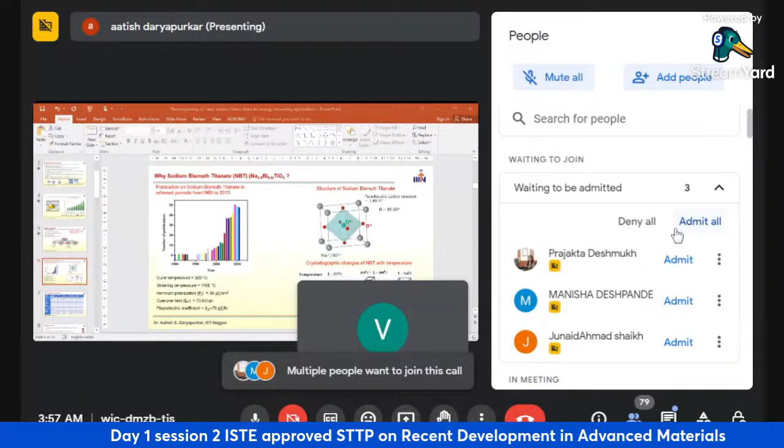Oh, you should have informed me earlier - there are many slides that I have shown, you could have told me sooner. Sorry. Now it is visible. Why is it not changing? Now it's showing, but not full screen - it should be full screen, no? What can be the solution for this? How should I share this? Yes, what is the solution? Okay, just give me a minute, I will rejoin the session.

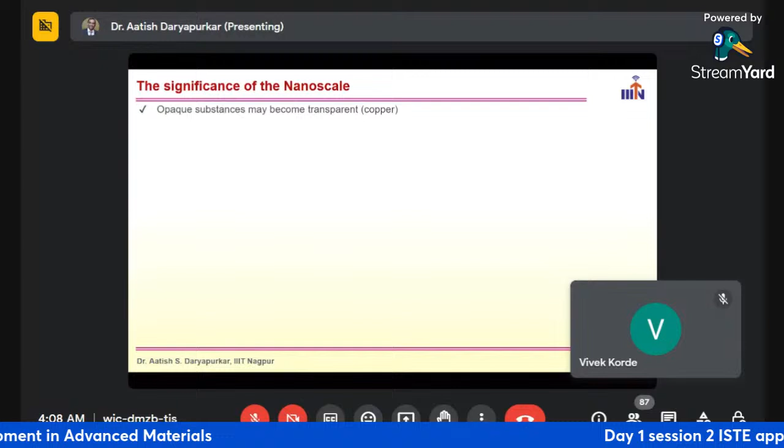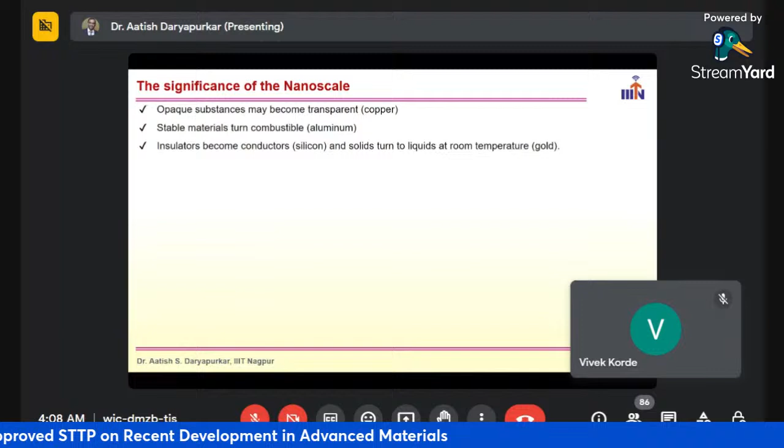For example, an opaque substance may become transparent in case of copper. Then stable materials turn into combustible materials, example aluminium. Then insulators become conductors, example silicon, and solids turn to liquid at room temperature, example gold.

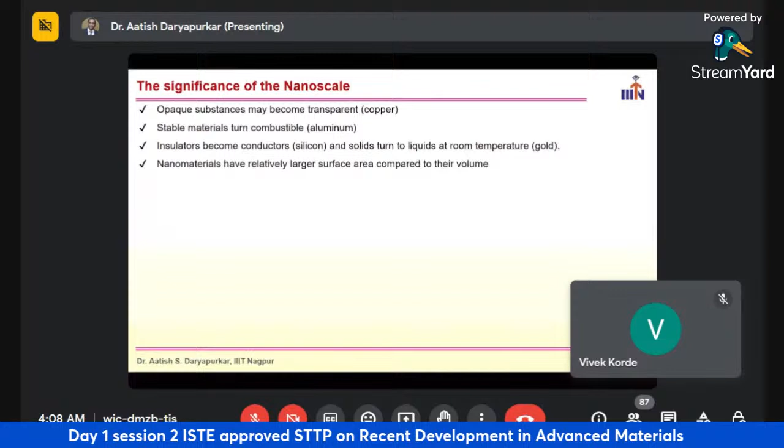Now, why does this property change? Because nanomaterials have a relatively large surface area compared to their volume. And you know that whatever happens in nature happens at the nanoscale. Now, the quantum effect can begin to dominate the behavior of matter at the nanoscale, affecting the optical, electrical, and magnetic behavior of materials. Now, what is the quantum effect? The effect or phenomena which can be explained using quantum mechanics, which cannot be explained using classical mechanics, is called the quantum effect.

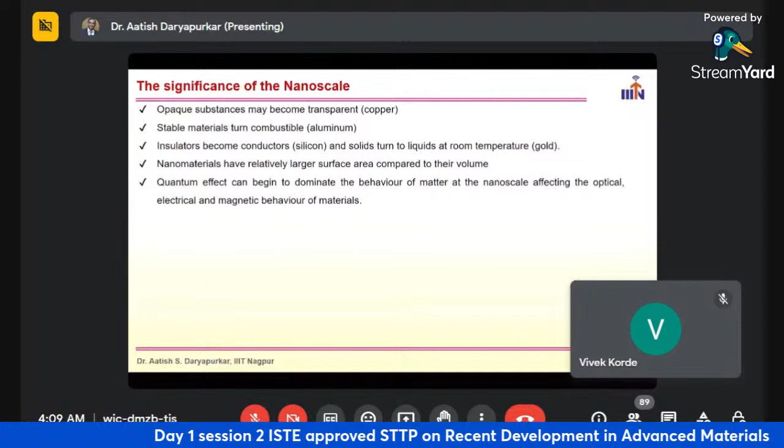Now, an example of this quantum effect is the tunneling effect. Then the bulk property of material often changes dramatically with nano ingredients, so you can get a better property. Then there are electronic and optical properties.

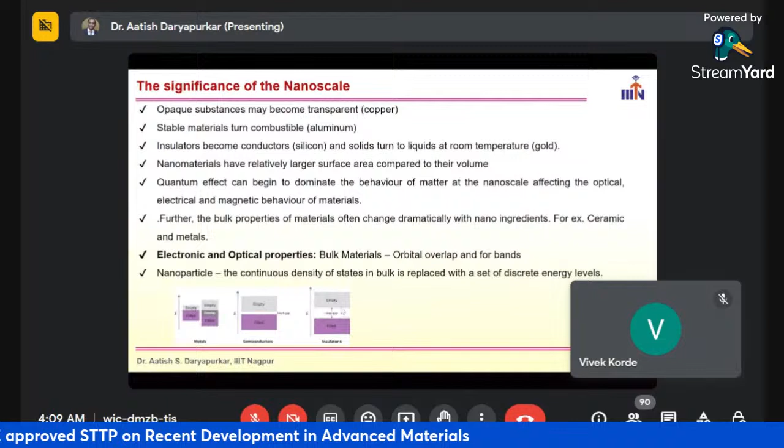For example, in bulk materials, we have bands, that is conduction band and valence band. Now, if you see metals, the valence band and conduction band overlap each other. If you see semiconductors, there is a small band gap between the conduction band and the valence band. And if it's an insulator, the band gap is larger between the conduction and valence band. Now, when we synthesize in the nano range, this band structure converts into discrete energy levels, and because of this, the electronic and optical properties are changed.

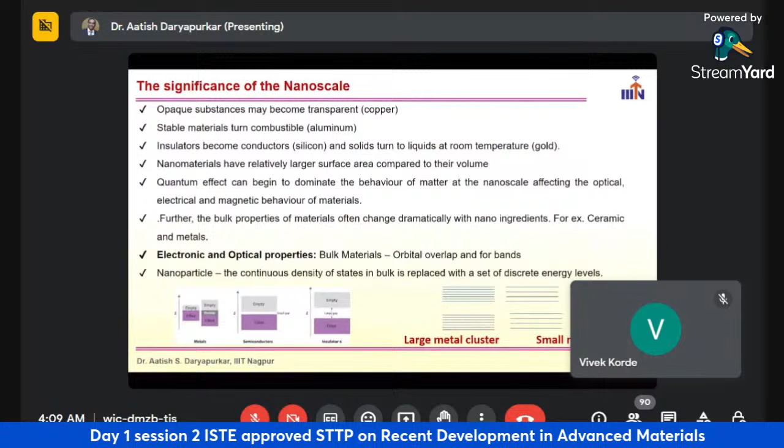Now the slides are going well with my talk.

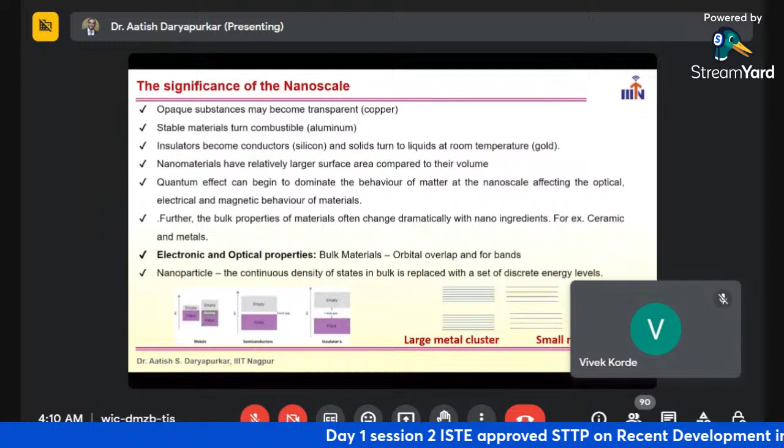Hello, am I audible? Ah, now the slides are going well with my talk. Okay, great. Now slide number 4 is going on, right? This is in the corner, right? Right, yes. So this was the slide we were discussing.

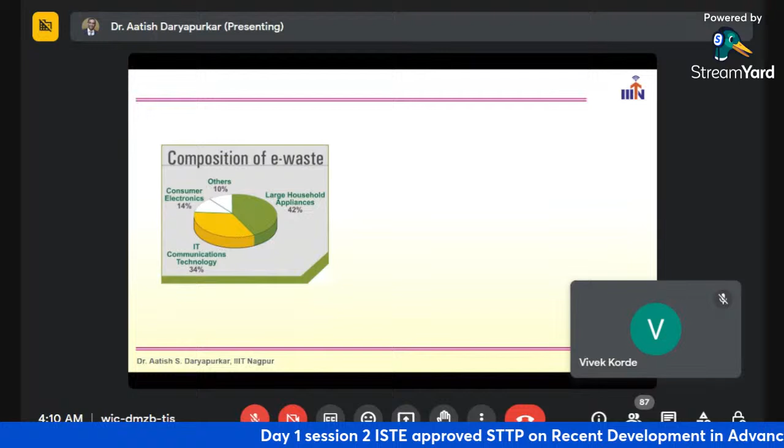Now you know that the electronic industry has developed a lot, and there's a lot coming up. So if you consider e-waste, called electronic waste, and look at the electronic instruments: large household appliances consist 42%, then consumer electronics 14%, IT communication technology is 34%, and others 10%.

So this much e-waste is produced, and the whole world is facing a lot of this e-waste problem. And how can we manage this e-waste problem? If you see data generated by the Center for Science and Environment from New Delhi, the volume of e-waste will go up to 2 million metric tons by 2025.

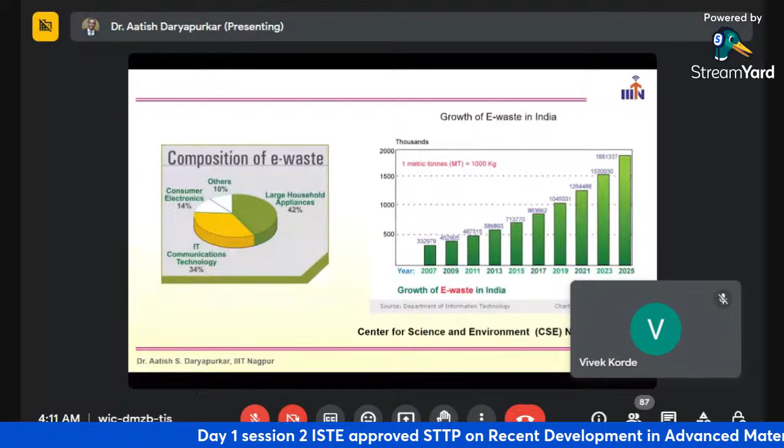And this issue can be solved in two ways. One way to solve e-waste toxicity would be to manage it properly. I was discussing we have a lot of batteries at our home, but we don't know how to destroy them, where we need to put them. We throw them in a dustbin, and from the dustbin that waste goes out to the village, to the city, and it spoils the complete environment - your water, your soil, your air. So if we have awareness on how to destroy e-waste, then that problem can be solved.

And another way to take care of this problem is to replace toxic materials which we use in device fabrication with non-poisonous or non-toxic materials that exhibit comparable properties. And that is exactly the motivation of my research work.

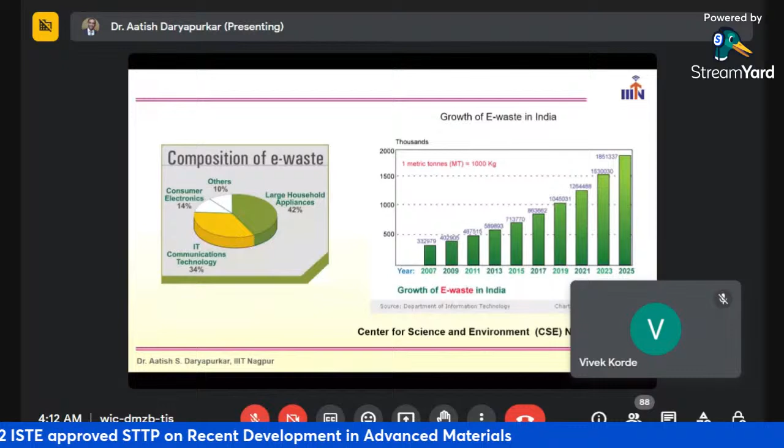Then I did the literature review and observed that the lead family - lead titanate, lead zirconate, lead magnesium, lead hafnate, lead stannate zirconate - this lead family exhibits very excellent properties which can be utilized for device fabrication. Majority of the time these materials are used in capacitors, and all materials are categorized depending on properties like dielectric, ferroelectric, piezoelectric, and pyroelectric.

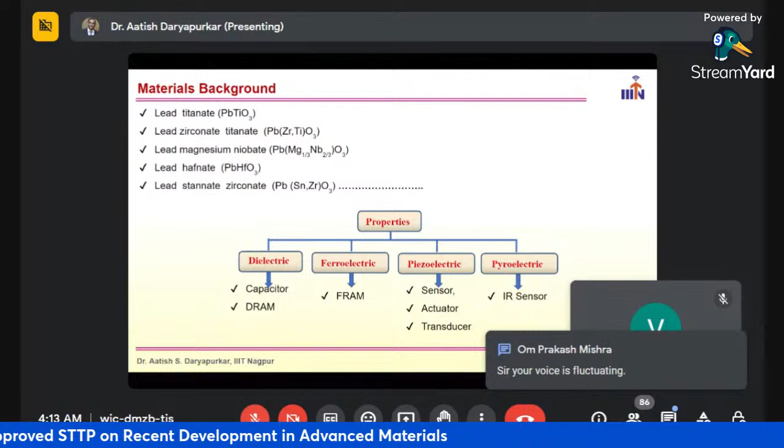Now, for applications like sensors, actuators, and transducers, materials should have a large piezoelectric coefficient, a rapid response, and accurate displacement. Now, pyroelectricity has been employed in infrared sensors because it can be operated at room temperature and meanwhile has good sensitivity and rapid response.

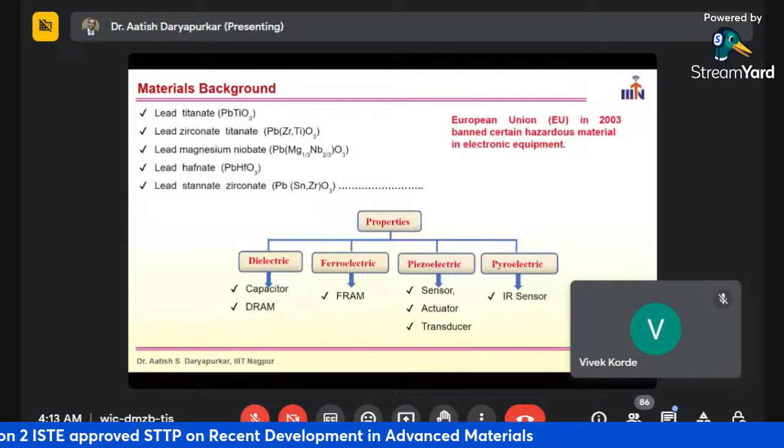This family of ceramic material contains lead (Pb), which is volatile, detrimental to human health, and causes environmental pollution. From the viewpoint of environmental protection and human health, the European Union in 2003 restricted the use of certain hazardous substances in electrical and electronic equipment. Therefore, efforts are being put into investigating lead-free materials exhibiting properties comparable with lead-based materials.

The next question was which material I should study. I observed that sodium bismuth titanate is one lead-free material which can replace lead-based materials. The chemical formula is Na0.5 Bi0.5 TiO3.

If you see the publications on sodium bismuth titanate in refereed journals from 1980 to 2013, there is a drastic increase in the number of research publications based on this material. I thought this material is very good for research purposes and it has excellent properties.

Its Curie temperature is 320 degrees Celsius. Sintering temperature is 1100 degrees Celsius. Remnant polarization is 38 microcoulomb per centimeter square. Coercive field is 73 kilovolt per centimeter. And piezoelectric coefficient is 79 picocoulomb per Newton.

This material exhibits perovskite structure. In the perovskite structure, on the corner you have sodium plus or bismuth 3 plus ions. In the body center you have titanium 4 plus ions, and at the face center you have oxygen O2 minus ions. Depending on the range, this material exhibits rhombohedral, tetragonal, and cubic structural phases.

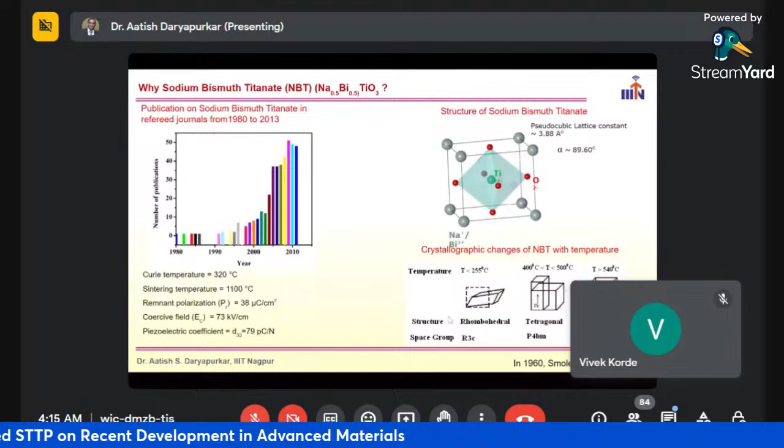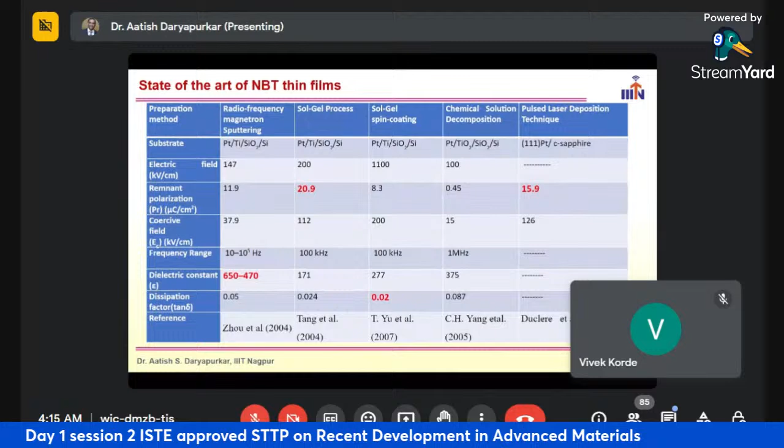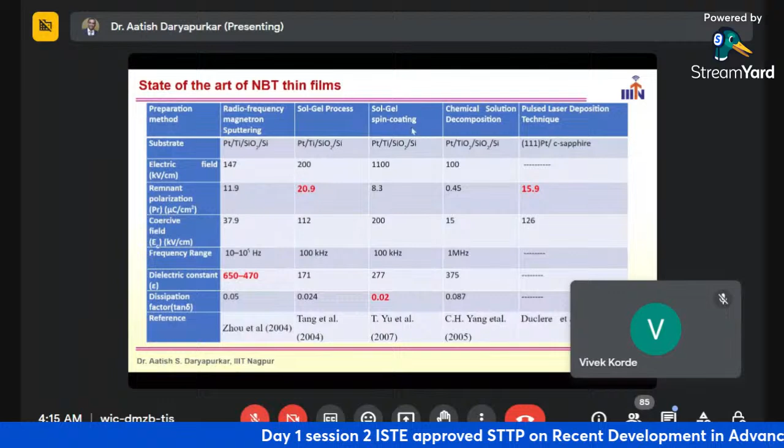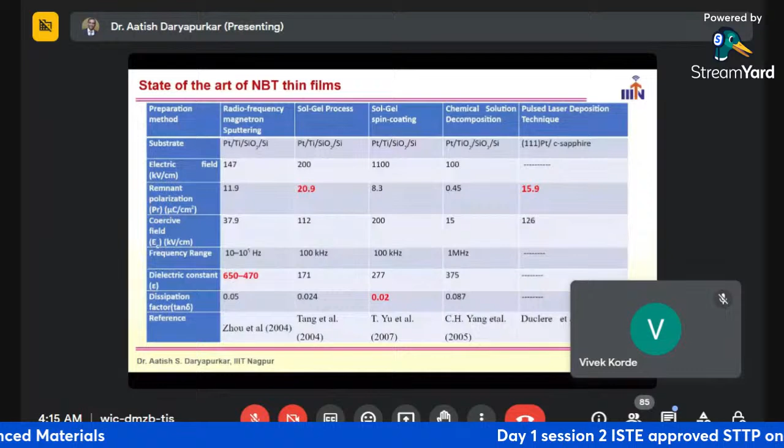When I observed, there is vast investigation in bulk and very few literature or research papers mention the thin film of this material. Thin films of sodium bismuth titanate have been deposited using radio frequency magnetron sputtering, sol gel process, sol gel spin coating, chemical solution decomposition, and pulse laser deposition technique. At that time there was only one research group in 2008 who published a research paper on sodium bismuth titanate thin film using pulse laser deposition technique.

Now I had a lot of questions in my mind. Can we improve the property of NBT thin films using pulse laser deposition technique? Is there any optimization strategy other than trial and error method? How will this methodology and strategy help me to improve the property? The answers to these questions became the problem statement of my PhD thesis.

The main purpose of my PhD is to grow good quality single phase NBT thin films using pulse laser deposition technique and study the structural, surface morphology, and electrical properties at room temperature.

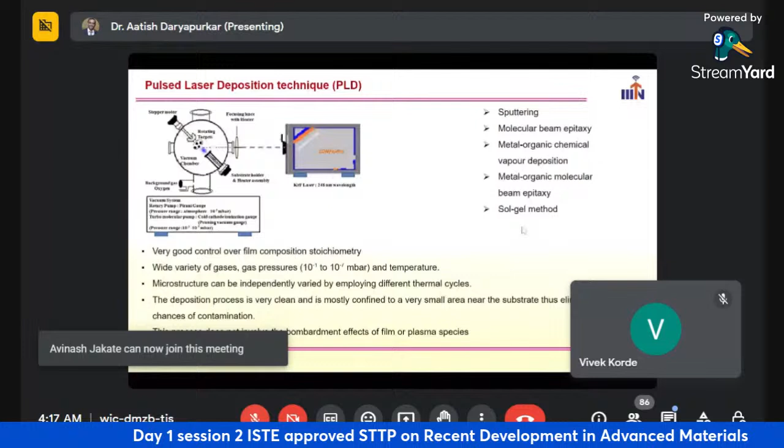Thin films can be deposited by various types of methods like sputtering, molecular beam epitaxy, metal organic chemical vapor deposition, metal organic molecular beam epitaxy, and sol gel methods. Among these methods, pulsed laser deposition technique has a lot of advantages.

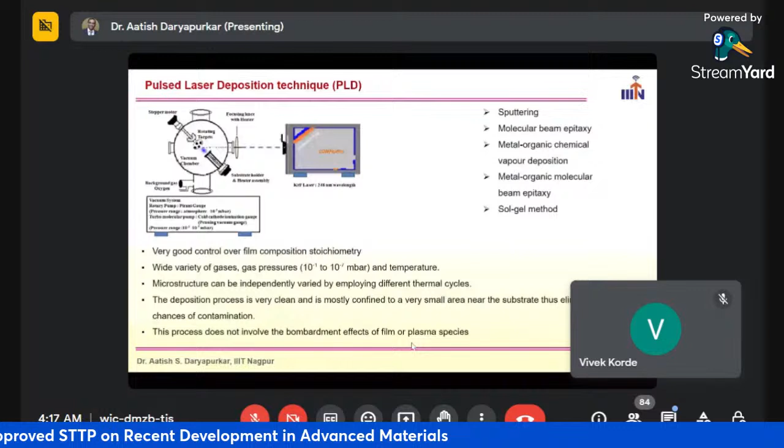So what are those advantages? It gives very good control over film composition stoichiometry. A wide variety of gases, gas pressure, and temperature can be utilized to deposit the films. Microstructure can be independently varied by employing different thermal cycles. The deposition process is very clean and mostly confined to a small area near the substrate, eliminating chances of contamination. This process does not involve bombardment effects of thin film or plasma species as in sputtering. Because of these advantages, I chose to select this method to synthesize the thin film.

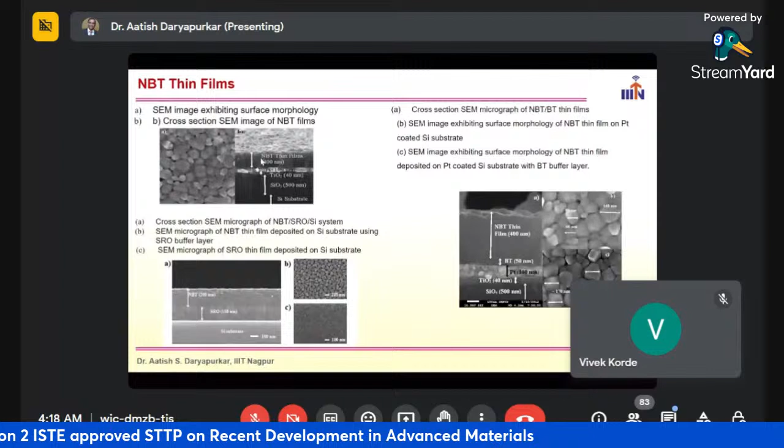After successfully synthesizing the thin films, I studied the surface morphology. This is the scanning electron micrograph in which you can see the substrate, platinum coated silicon, where platinum is 100 nanometers. This platinum coated silicon substrate is available ready-made in the market, on which I deposited the thin films of sodium bismuth titanate, which is 400 nanometers. This is the cross-section view, and this is the top view, where you can see different types of grains and grain sizes. Because of this surface morphology, the dielectric property of the thin films depends on the microstructure.

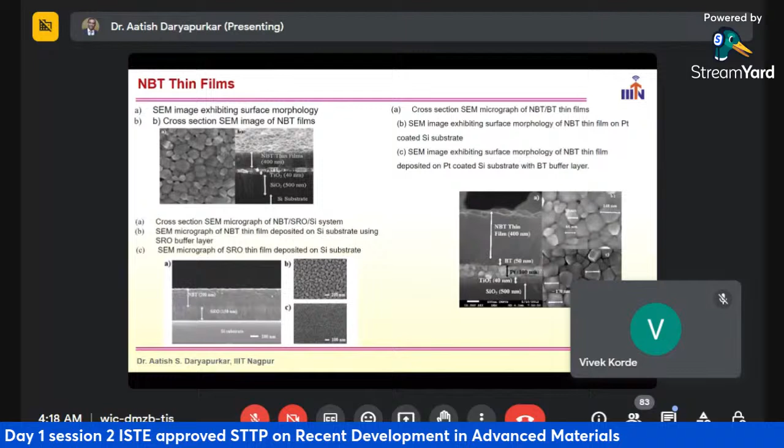The study of microstructure in nanoscience and nanotechnology is very important. After optimizing all the parameters like pulses, depositions, and compositions, we have successfully deposited thin films which have excellent surface morphology or microstructure.

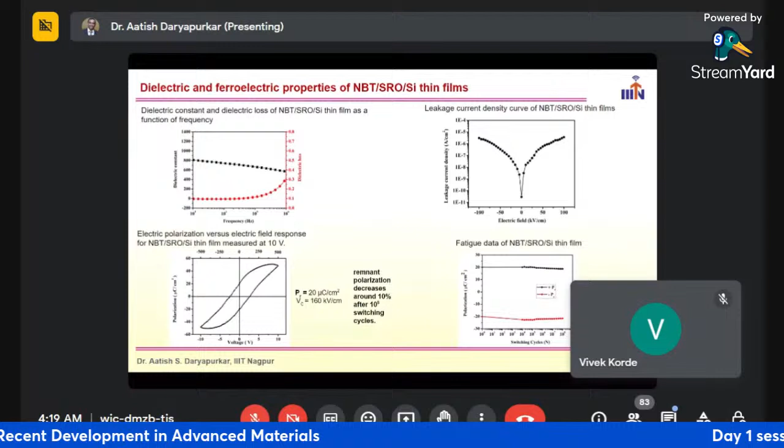Since we are looking for dielectric capacitor applications, it is very important to study the dielectric constant, dielectric loss, P-E loop, polarization loop, and fatigue data. This is the data from the ideal optimized sample, sodium bismuth titanate, on different substrates. A few research papers have been published during my PhD on this work.

Then what is next? That was the question. What is next?

I thought that now I have deposited the thin film of sodium bismuth titanate, which is a two-dimensional nanostructure. Now, can we synthesize the one dimension? One-dimensional nanostructure, you know, that is the nanofiber, the nanowire.

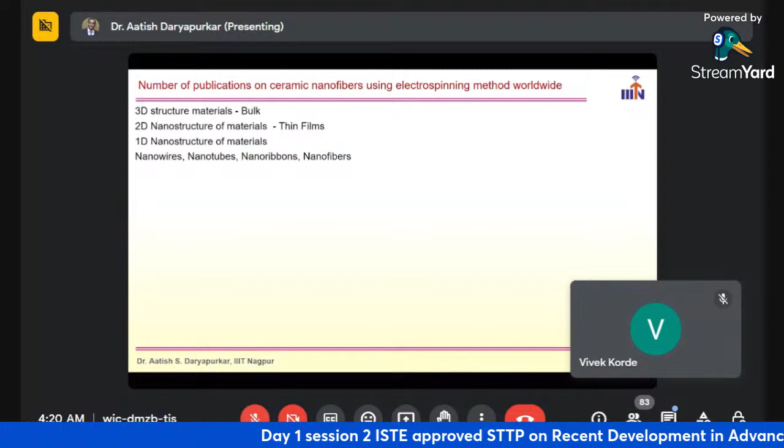One-dimensional nanostructures such as nanowire, nanotubes, nanoribbons, and nanofibers continue to be at the forefront of nanoscience and nanotechnology. Several ferroelectric and piezoelectric nanowires and nanofibers are promising in making great breakthroughs. Nanofibers belong to the class of nanomaterials with diameter less than 100 nanometers and aspect ratio greater than 1000.

They are characterized by high surface area to volume ratio, making them a potential candidate for a large number of applications because of the combination of high surface area to volume ratio and structural flexibility.

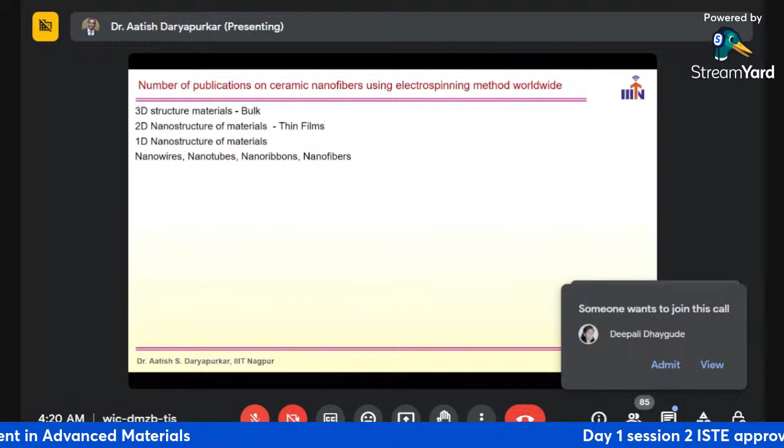Nowadays flexible electronics research is going on, and every device we want flexible. The huge surface area available on the nanofiber makes it very suitable for new technology, which requires smaller and smaller environments for chemical reactions to occur, increasing the surface area for chemical reaction.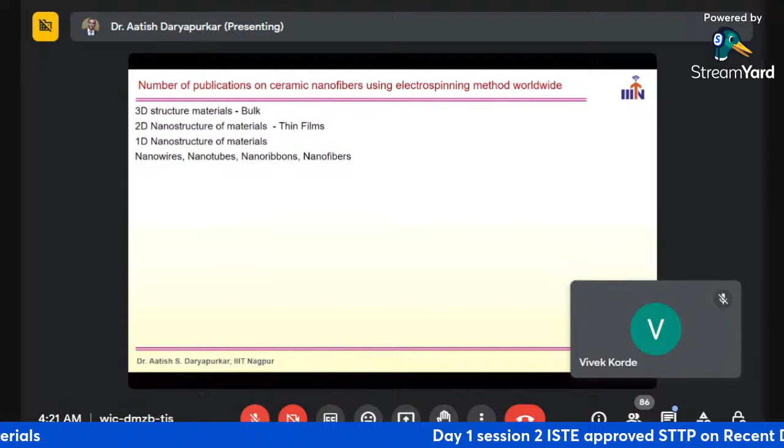Nanofibers are pure and novel materials for sensing and actuation, which is still essential and drives the development of piezoelectric ceramic fiber. This leads to the origin of this project: electrospinning of lead-free NBT-based material for sensor and energy harvesting applications.

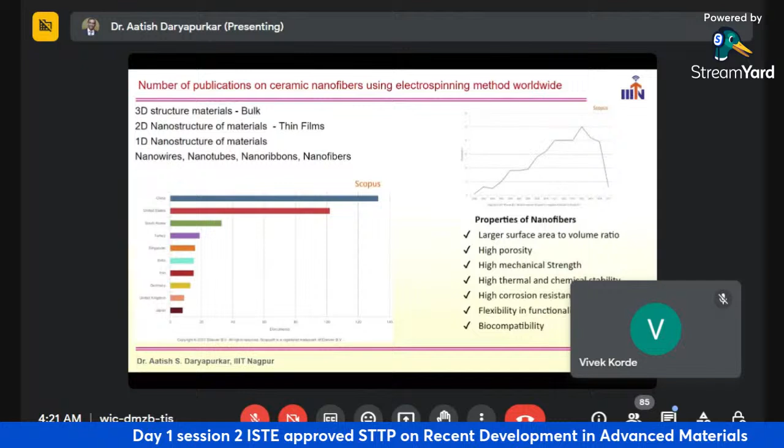When I did the literature review, I found there is an increasing number of research papers in the study of nanofibers, and these are the advantages. Why nanofiber? Because of large surface area to volume ratio, high porosity, high mechanical strength, high thermal and chemical stability, high corrosion resistance, flexibility in functionalization, and biocompatibility. Because of these advantages, nanofibers of any kind of material are very important.

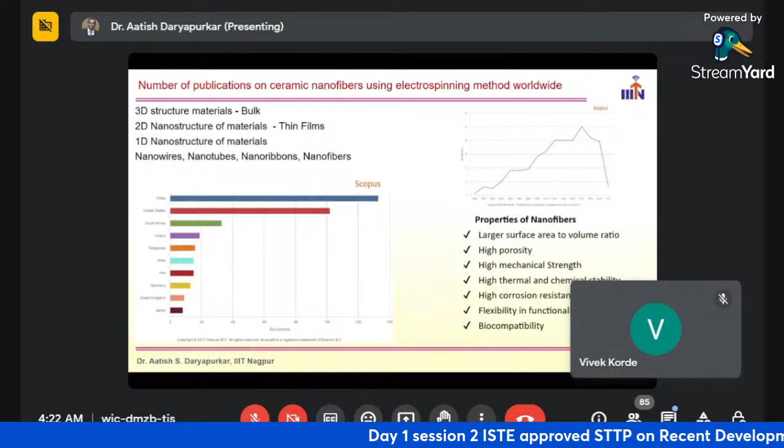Then I wrote the research proposal for the DST when I joined as an assistant professor at IIIT Nagpur, and luckily this project was approved by SERB DST. The title of the project is Electrospinning of Lead-Free NBT-BT-based Material for Sensor and Energy Harvesting Applications.

Now the question is, why electrospinning? There are many methods by which we can synthesize nanofiber: template synthesis technique, phase separation technique, self-assembly technique, and electrospinning technique. Why did I choose electrospinning technique?

It has the ability to produce continuous nanofiber of different polymers and the capability to generate ultra-thin fiber of controllable diameter, composition, orientation, and high entrapment efficiency, control over pore geometry, high surface area, and high encapsulation of molecules. These are the advantages of electrospinning technique, and that is why I chose it for synthesis.

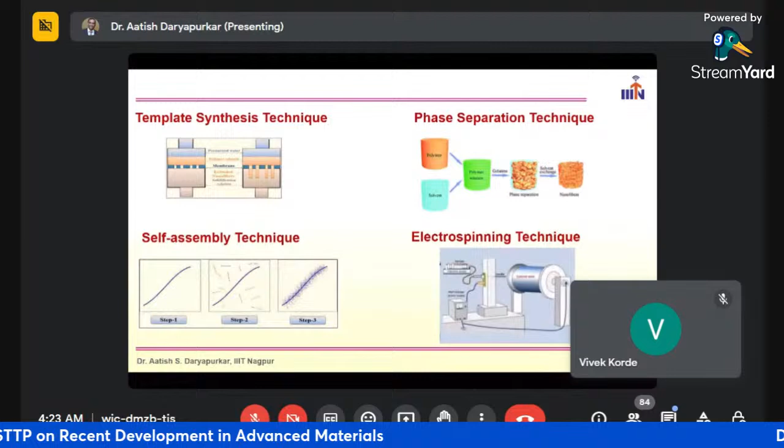In recent years, numerous electronic devices have been developed, including devices that can be worn on the body, such as smartwatches, fitness trackers, and even smart fabric. As the demand for these wearable devices has grown, power issues have become a major consideration.

In general, wearable devices with batteries must be lightweight, flexible, stretchable, and highly durable. Most importantly, the battery should be able to self-generate so that wearable devices can operate without having to be charged externally. Most wearable devices generally use power stored in the form of electrochemical energy in the battery.

However, it is not only difficult to make a flexible battery, but the battery must also be replaced or recharged. Some researchers attempt to meet this challenge by proposing a self-charging battery that harvests energy from various sources such as solar energy, electromagnetic energy, and wind energy.

Batteries charged with such sources are often unstable because they are affected by the surrounding environment as they charge. Whereas energy harvesting from body movements has the advantage of being less affected by the surrounding environment. We can convert one energy into another energy.

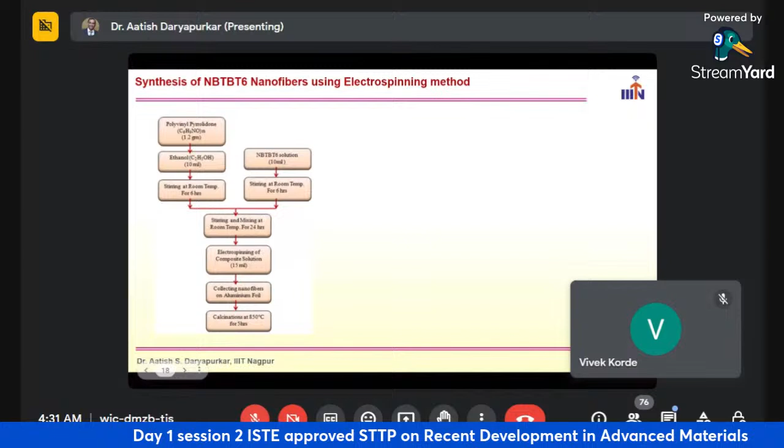Now, the target was to synthesize the nanofiber of sodium bismuth titanate, barium titanate composition, NBT-BT6. So we have followed this method to synthesize the polymer-based solution of the sodium bismuth titanate, and we have optimized the parameters.

Applied voltage is 21 kilovolt. Solution flow rate was 0.4 microliter per second. Distance between collector and spinneret is 15 centimeter. Nozzle diameter is 24 gauge and the plastic syringe inner diameter is 13.8 mm. These are the parameters for the synthesis of the nanofiber.

But it is not so easy. You have to optimize all the parameters to synthesize the nanofiber successfully.

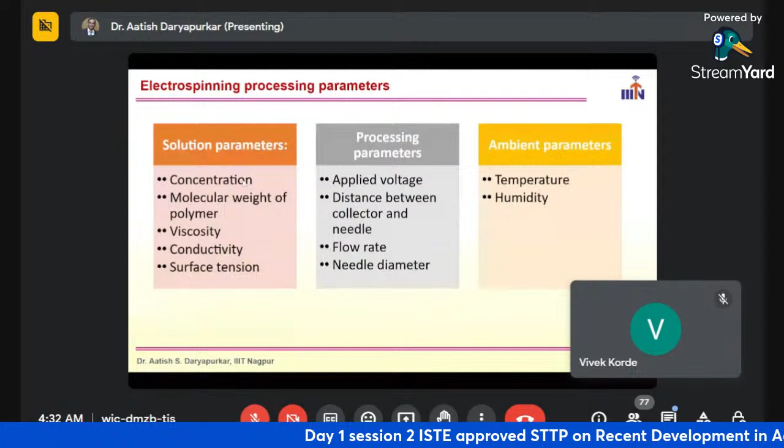Apart from instrument parameters, there are solution parameters also, which decide whether the fiber will be synthesized or not. These include concentration, molecular weight of polymer, viscosity, conductivity, and surface tension. Then processing parameters: applied voltage, distance between collector and needle, flow rate, and needle diameter. Ambient parameters like temperature and humidity also affect the process.

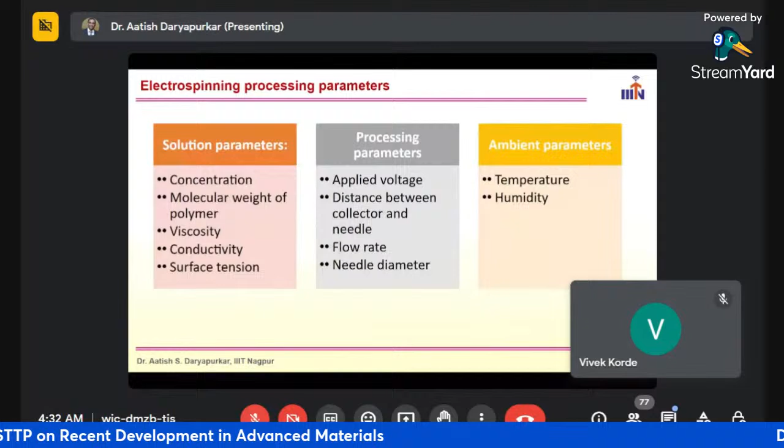Solution parameters include polymer concentration, molecular weight, conductivity, viscosity, surface tension, solvent volatility, and solution temperature. The polymer concentration significantly affects the fiber size, morphology, chain entanglement, and uniformity of prepared nanofibers.

Polymer concentration also plays a decisive role in the outcome of the electrospinning process. Low concentration leads to formation of beaded fibers, and intermediate concentration yields good quality fibers. High concentration results in bimodal size distributions, and even higher concentration causes distorted depositions. So depending on the polymer concentration, we can get different kinds of fibers.

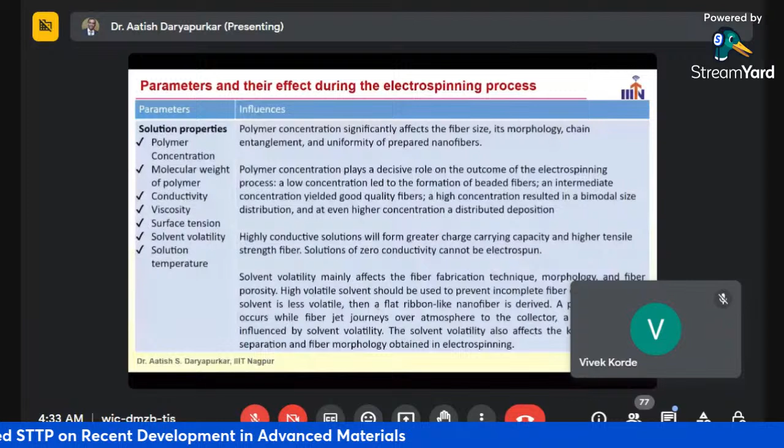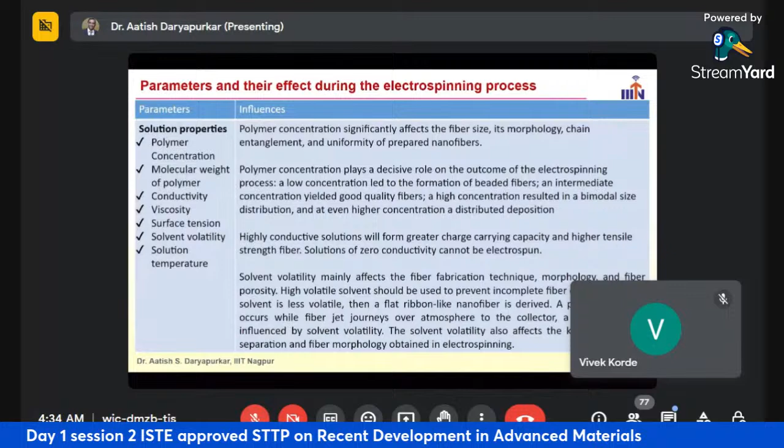Highly conductive solutions form fibers with greater charge carrying capacity and higher tensile strength. A solution of zero conductivity cannot be electrospun, because the solution should be conducting since it is extracted from one electrode and collected on another electrode. If your solution is not conducting, you cannot spin the fiber of the material. So your solution should be conducting.

Solvent volatility mainly affects the fiber fabrication technique, morphology, and fiber porosity. A highly volatile solvent should be used to prevent incomplete fiber drying.

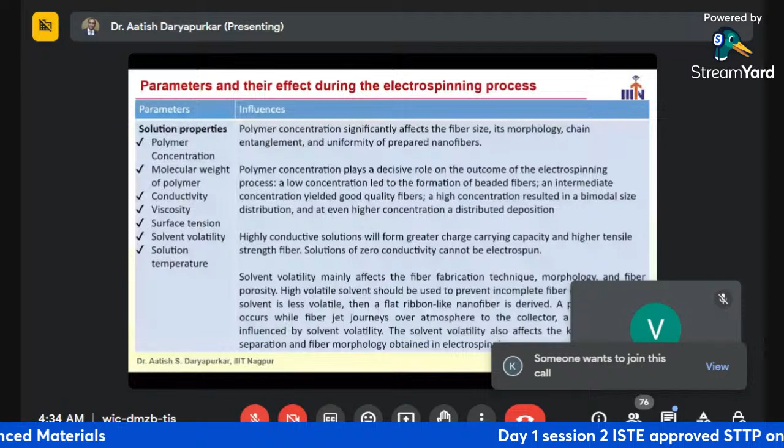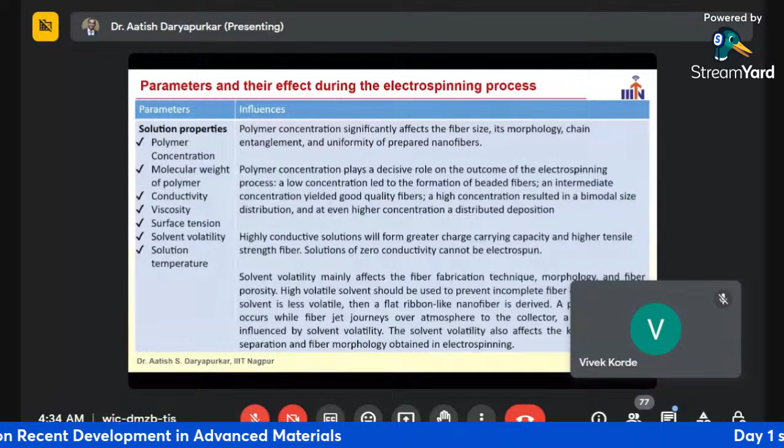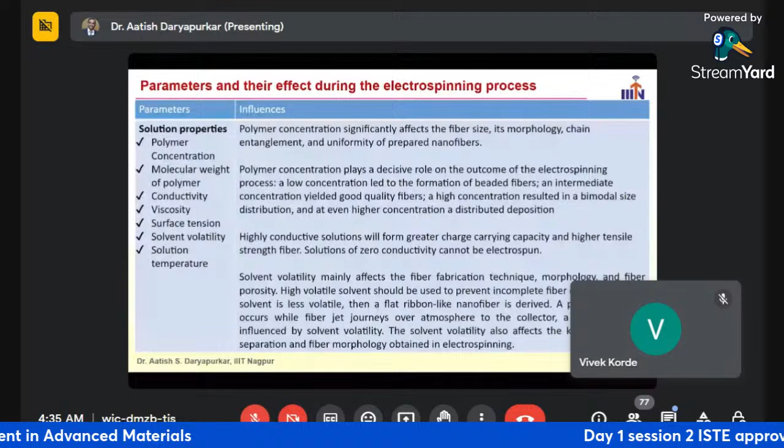When the solution gets extracted from the needle, it should evaporate so you get fibers on the collector. If the solvent is less volatile, a flat ribbon-like nanofiber is derived. A phase separation occurs while the fiber jet travels through the atmosphere to the collector, a process greatly influenced by solvent volatility, which also affects the kinetics of phase separation and the fiber morphology obtained in electrospinning.

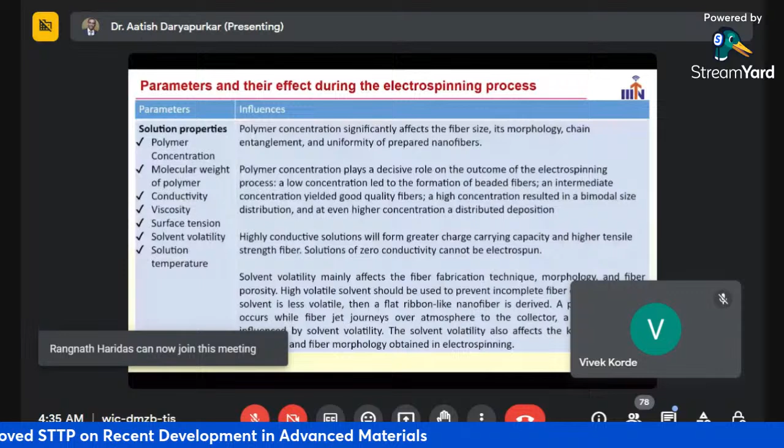Overall, the polymer concentration, conductivity of the solution, and volatility of the solution play a very important role in obtaining the desired fiber.

Another important parameter is applied voltage. We have to apply an electric field or high voltage between two electrodes. One electrode is the needle, the other is the collector. The high voltage applied between them causes the solution to be extracted from the needle and collected as fiber on the collector.

High applied voltage will increase the instability and stretching of the jet and produce smaller fiber diameter. The size range of nanofibers can be controlled by adjusting the strength of the applied voltage to an optimal value, which differs for different polymers.

Now, the polarity of the tip. The capillary tip polarity mainly affects nanofiber quality, dimension, diameter, and areal density. Negatively charged capillary tips produce fibers with average diameter found to be significantly larger at all concentrations. A capillary tip of negative polarity decreases the areal density of the fiber mat spun, due to an increased number of charges per unit jet segment. So the polarity of the electrode is also very important.

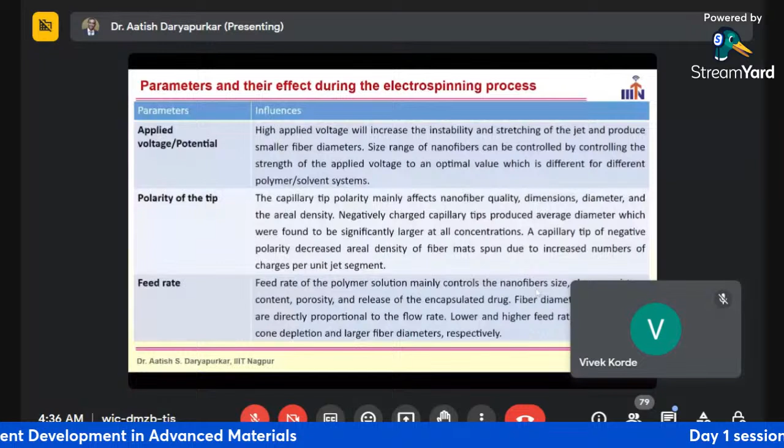Then feed rate. The feed rate of the polymer solution mainly controls the nanofiber size, shape, moisture content, porosity, and release of encapsulated drugs. The fiber diameter and pore size are directly proportional to the flow rate. Lower and higher feed rates cause Taylor cone depletion and larger fiber diameter respectively.

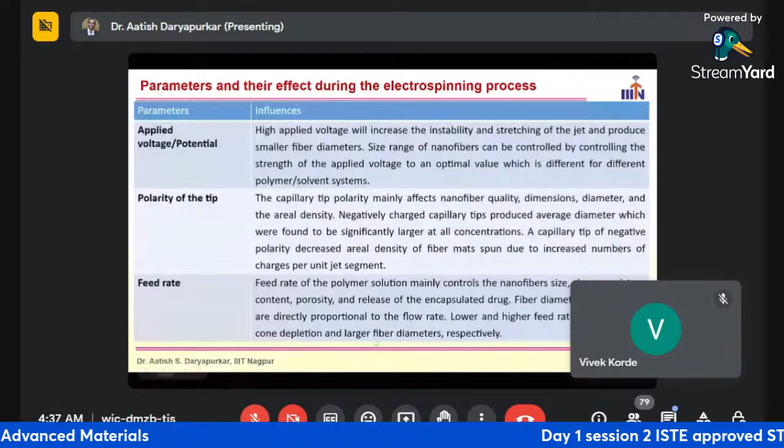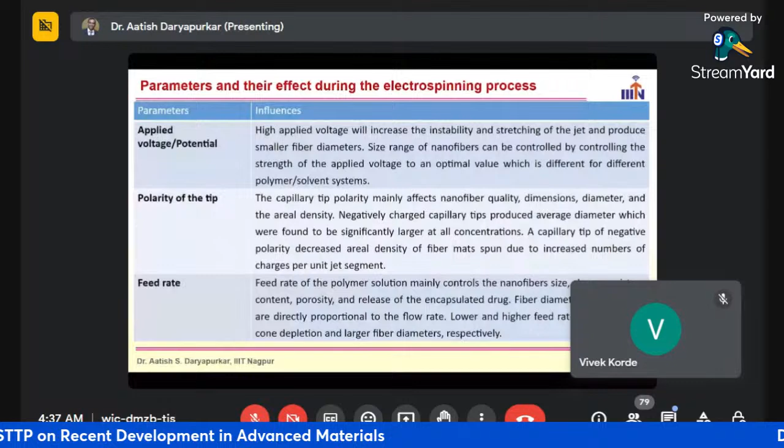So the dimension of the fiber, that is the diameter, can be optimized or controlled by the feed rate, polarity of the tip, and the applied voltage.

We have different kinds of collectors depending on the application and the requirement of the nanofiber. Depending on what nanofiber you would like to have for a particular application, you need to use a particular collector.

Now you have a cylindrical collector, a plain cylinder, which can be used as a collector. You have a plain, immobile metal plate that can also be used as a collector.

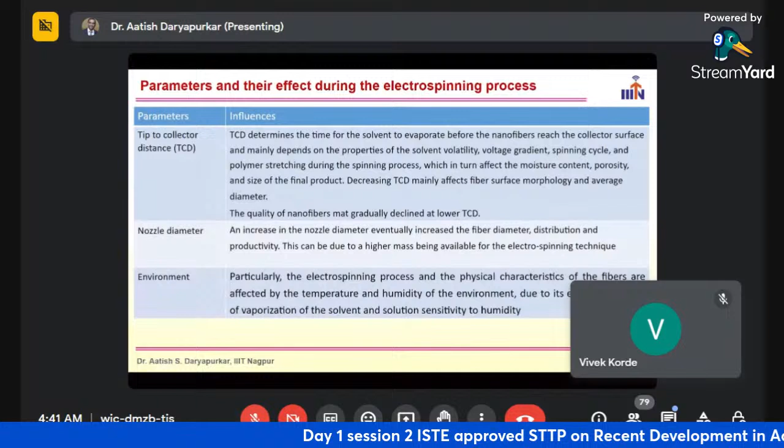Then environment - obviously, for any chemical reaction or experiment, environmental parameters are very much important. The electrospinning process and physical characteristics of the fibers are affected by the temperature and humidity of the environment, due to its effect on the rate of evaporation of the solvent and the solution's sensitivity to humidity.

So, considering all these parameters, we were able to successfully synthesize the nanofiber of the sodium bismuth titanate and barium titanate compositions.

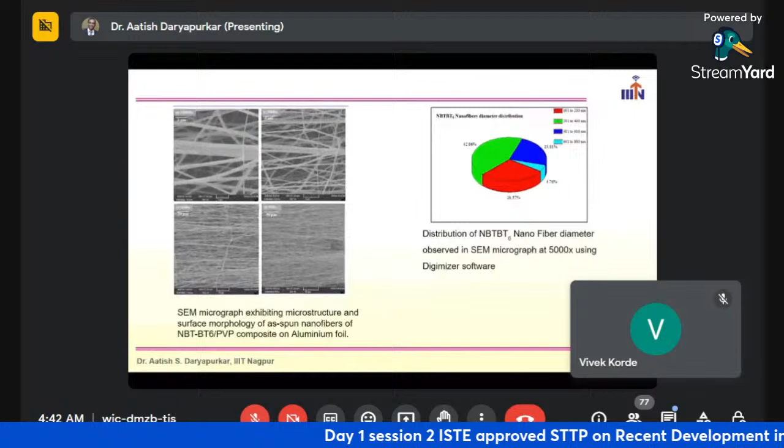If you see, in the 1 to 200 nanometer range, shown in red, 28.57% of the nanofibers fall. Then 42.86% of the nanofibers are in the range of 200 to 400 nanometers. Then there are ranges of 400 to 600 nanometers, and 600 to 800 nanometers - that is the diameter of the nanofiber. So the highest diameter of the nanofiber is 800 nanometers, and the minimum diameter of the fiber is 1 nanometer.

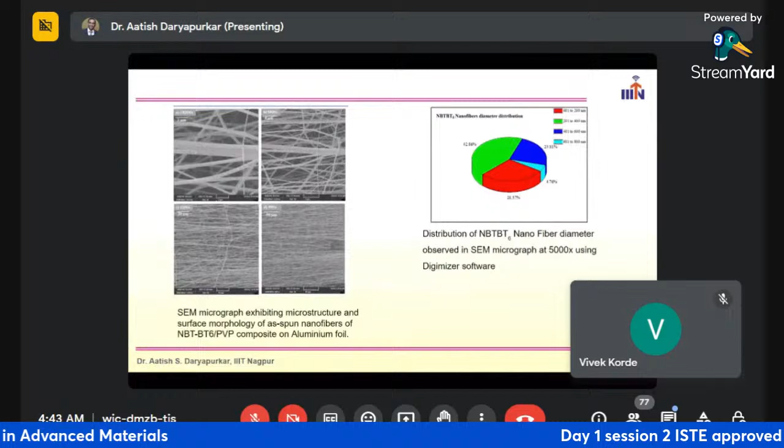So there is a different kind of electrospinning technique. Then, what are the applications of this nanofiber?

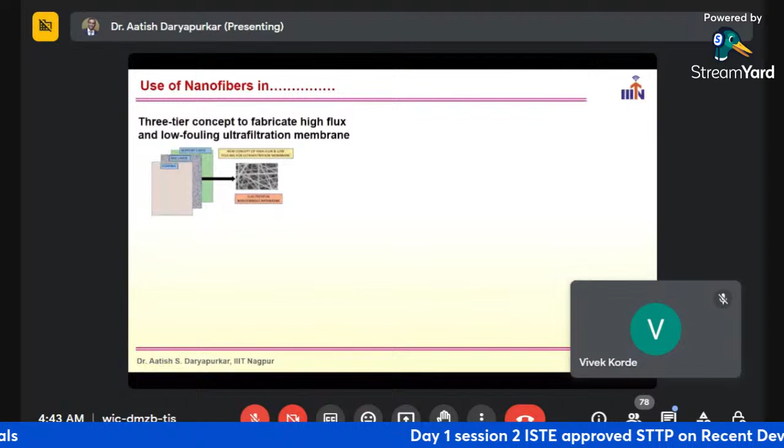This nanofiber can be used in the three-tier concept to fabricate high flux and low fouling ultrafiltration membranes. So in the filtration industry, these nanofibers are very much important.

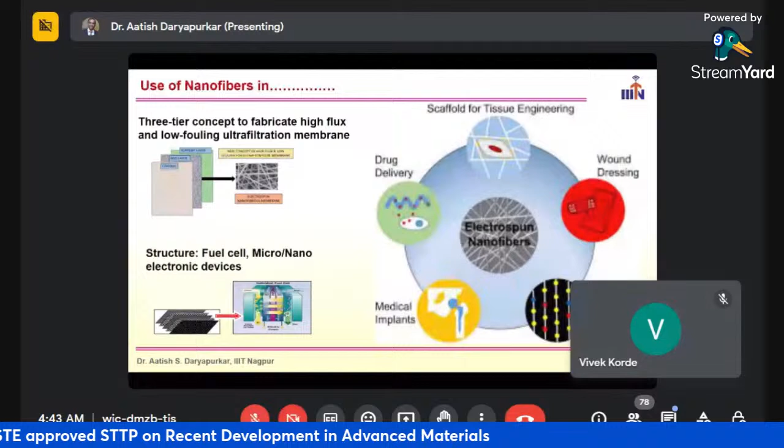Then the fuel cell, that is micro nano electronic devices. In fuel cells you can use the nanofiber. Then you can use this nanofiber in drug delivery, scaffold for tissue engineering, wound dressing, biosensors, and medical implants.

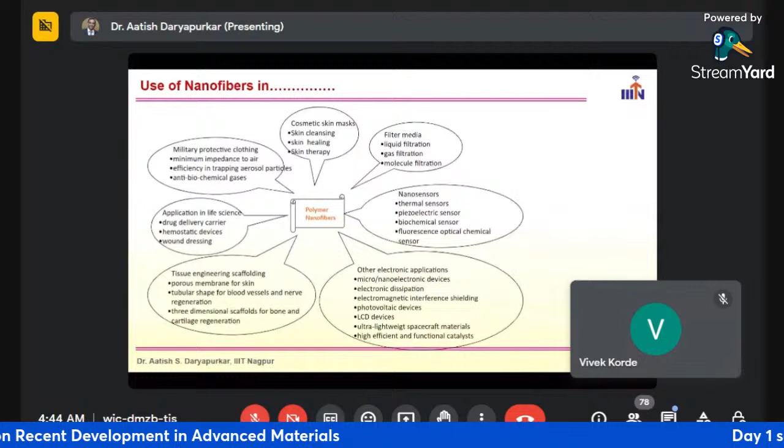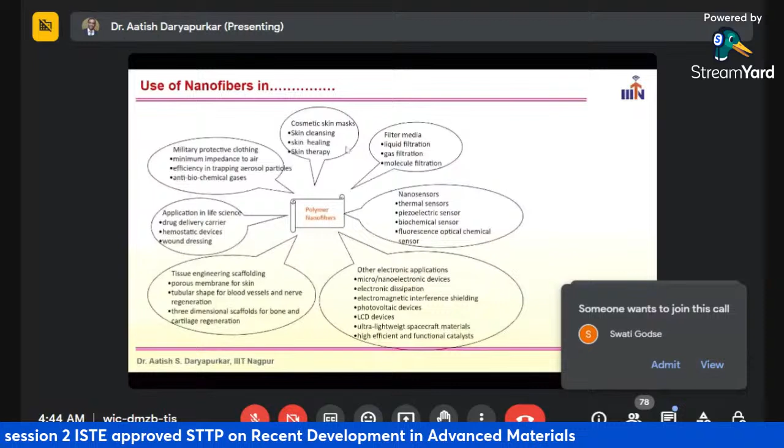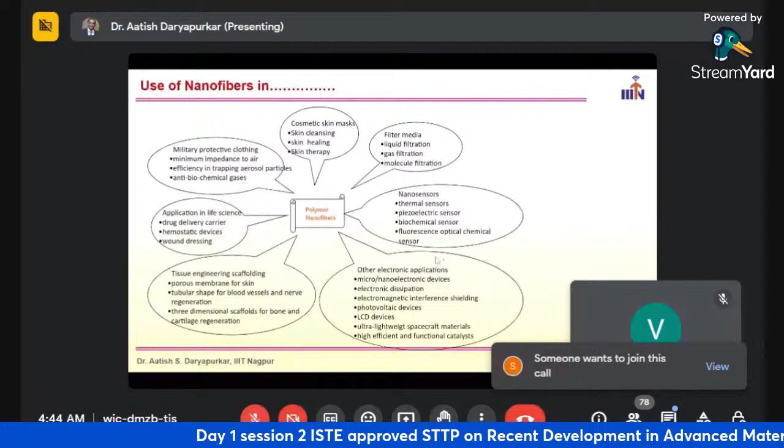Now, based on the literature survey and current achievements in electrospinning, electrospun nanofibers are expected to play an important role in various application areas. You can see it can be used in cosmetic skin masks, skin cleaning, skin healing, skin therapy, filter media, liquid filtration, gas filtration, molecule filtration, nano sensors, thermal sensors, piezoelectric sensors, biochemical sensors, fluorescent and optical chemical sensors. Then other electronic applications like micro nano electronic devices, electronic dissipation, electromagnetic interference, photovoltaic devices, LCD, ultra lightweight spacecraft material, and high efficiency functional catalysis.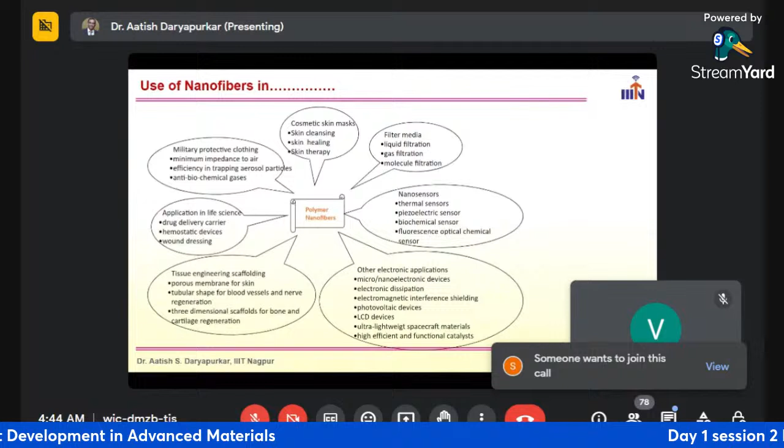On this side, you can see the military and medical applications where nanofiber can be used. Now, improved large-scale nanofiber production offers high-quality nanofibers and reduces the application cost. According to the emerging trend, new discoveries and patents promise nanofibers in upcoming years.

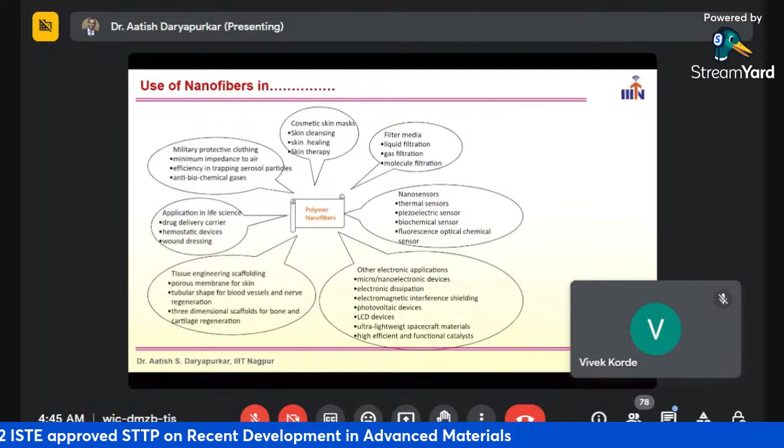Now, one of the applications we are going to discuss is the energy harvesting application. So, wearable core-shell piezoelectric nanofiber yarns for body movement energy harvesting applications. This is the paper published by Sang Hoon that I have considered for the discussion. In this paper, they fabricate a wearable piezoelectric energy harvester based on core-shell piezoelectric yarns with external electrodes.

So, flexible piezoelectric nanofibers of BNTST, right? BNTST, so this is the chemical formula. It is also a composite material of sodium bismuth titanate and ST, that is strontium titanate. So its short form is BNTST.

So they have fabricated core-shell piezoelectric yarns with external electrode, and flexible piezoelectric nanofibers of BNTST material and polyvinylidene fluoride trifluoroethylene polymer were initially electrospun. Then subsequently, the core-shell piezoelectric nanofiber yarns were prepared by twining the ends around the conductive thread. So to create the outer electrode layer, the core-shell piezoelectric nanofiber yarns were braided with conducting thread. Then core-shell piezoelectric nanofiber yarns with external electrode were directly stitched onto the fabric.

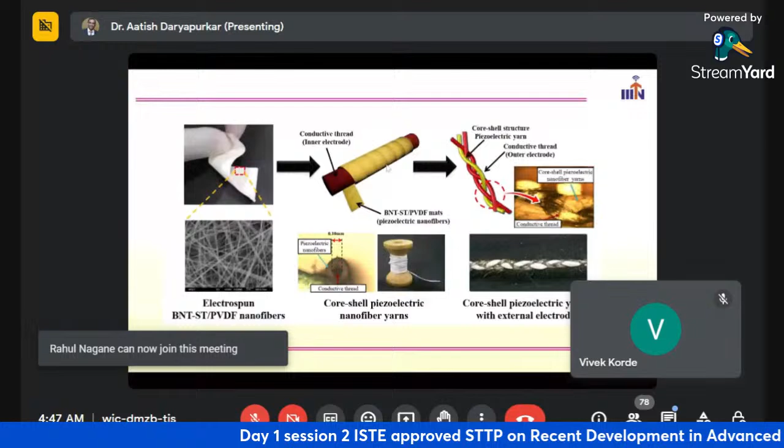Let me show you a diagram here. So now see, this is the conducting thread, this is the inner electrode. On top of it, a BNTST nanofiber mat has been coated on this conducting electrode. Then core-shell piezoelectric nanofibers - so this figure shows the core-shell structure: this is the conducting thread and this is the piezoelectric nanofiber. So this is the core-shell structure nanofiber, with external electrode, then directly stitched onto the fabric. So this has been stitched into the fabric.

So if you see, there is a core-shell structure piezoelectric shown in yellow color, and there is a red color fiber that is the conductive thread. So that has been done.

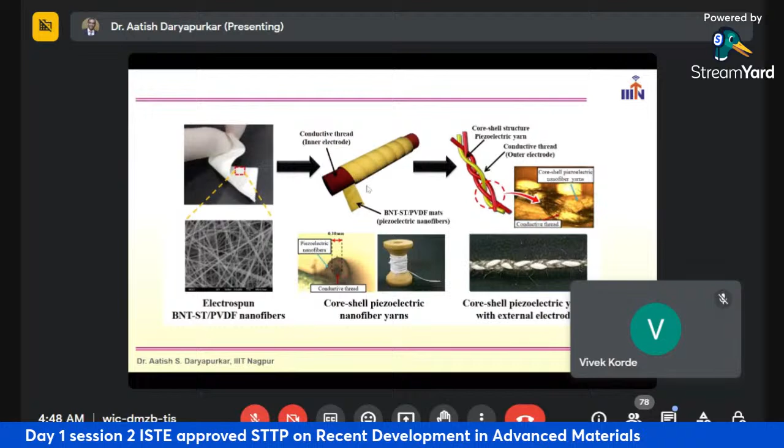So in the bending test, the output voltage was investigated according to the total length, area, and stitching interval of the piezoelectric yarns. The stitching patterns of the piezoelectric yarns on the fabric were optimized. Based on this result, the output voltage of the stitched piezoelectric yarns on the fabric improved with an increase in pressure, and the output voltage characteristics were investigated according to various body movements, especially pressing conditions. So you might have understood how they have synthesized this core structure nanofiber.

In this core structure nanofiber, there is a conducting thread and a piezoelectric nanofiber, right? And this is the scanning electron micrograph where you can see the nanofiber. This is the fabric, and in yellow color you have the core-shell structure piezoelectric, and this red color is the conductive thread. In this way, they have fabricated this core-shell piezoelectric yarn with external electrode.

Now, since these nanofibers are synthesized from piezoelectric material, and piezoelectric material has the property to generate electricity, or convert mechanical energy into electrical energy, to study that they have measured the output voltage according to the total length, effective area, and the stitching interval of core-shell piezoelectric yarns during the bending test.

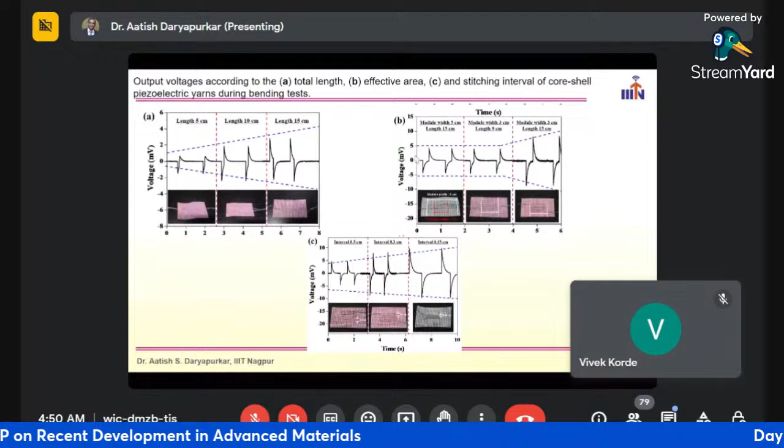If you see here in the second diagram, there is module width 5 centimeter length and 15 centimeter, then module width 3 centimeter length and 9 centimeter, then module width 3 centimeter and 15 centimeters. So this is the effective area. Now for this effective area, you can see there is a generation of voltage from 5 to -5 millivolt.

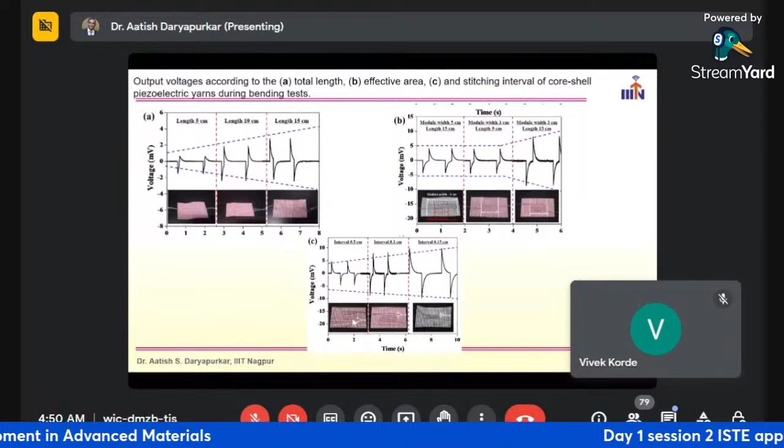Now here there is an interval of 0.5 centimeter, 0.3 centimeter, 0.15 centimeters. So they have changed the interval of this fiber, the distance between the fibers, by forming different kinds of shapes on the fabric, and they have studied the voltage generated from the bending test.

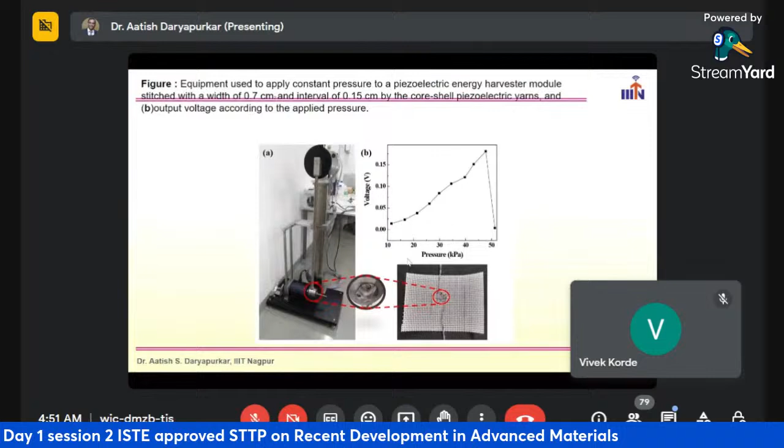When you increase the pressure from 10 kilopascal to 50 kilopascal, the generated voltage is increasing. After that, at extreme pressure, there is a decrease in voltage, or it can even go to zero. So again you can get the voltage at a particular pressure, and you have to optimize the pressure for these two characterizations.

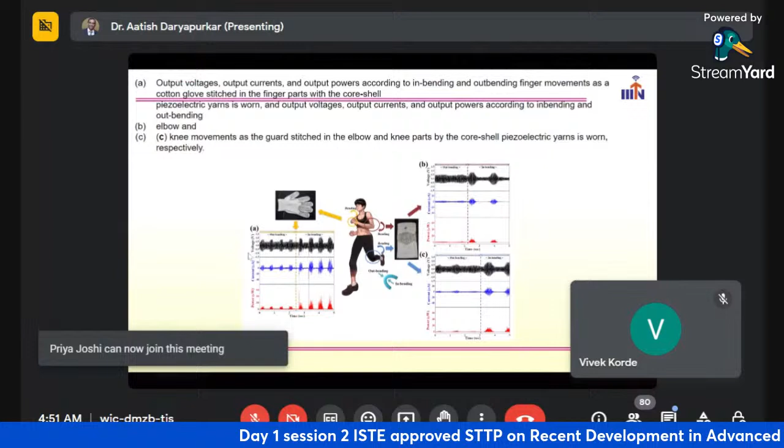Then they also studied this sample, shown in figure A, where output voltage, output current, and output power are measured according to in-bending and outbending finger movement, as a cotton glove stitched in the finger parts with the core-shell piezoelectric nanofiber is worn.

So they have studied this fabric on the fingers, on the palm, and on the bending of the elbow. They prepared this special fabric with the sample, and there is a signal of voltage, current, and power. In figure B it is from the elbow bending test, and another is from the knee bending test.

So on the body they did this calculation at three places: on the palm where fingers bend, on the elbow, and on the knee. For this, they used a special fabric on which they put our sample, the piezoelectric nanofibers with core-shell structure, and studied how the mechanical energy, the movement of the body, is converted into electrical energy.

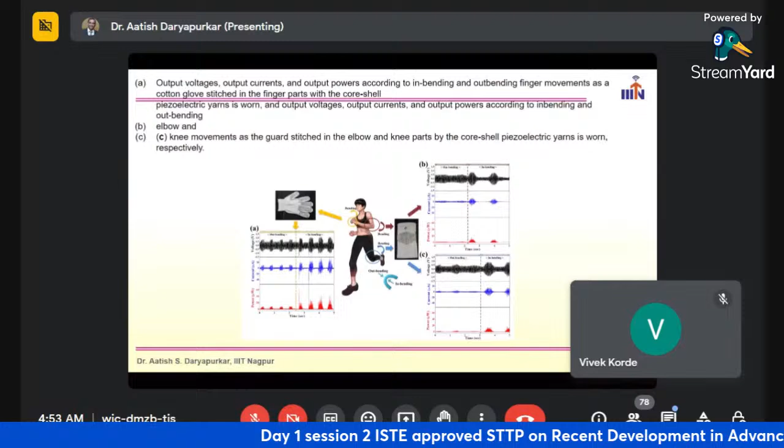Then again they studied the clapping movement: output voltage, output current, and output power according to the clapping movement, as a cotton glove stitched in the effective area with the core-shell piezoelectric nanofiber is worn. They also studied output voltage, current, and power according to walking and running movements, as a shoe insole stitched in the effective area with the core-shell piezoelectric nanofiber is worn.

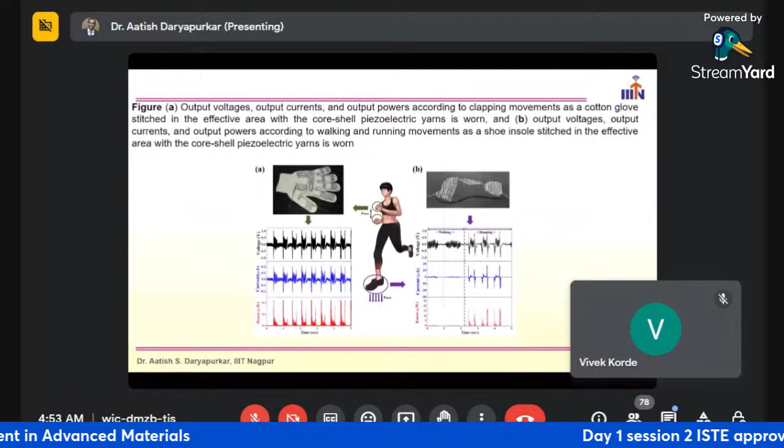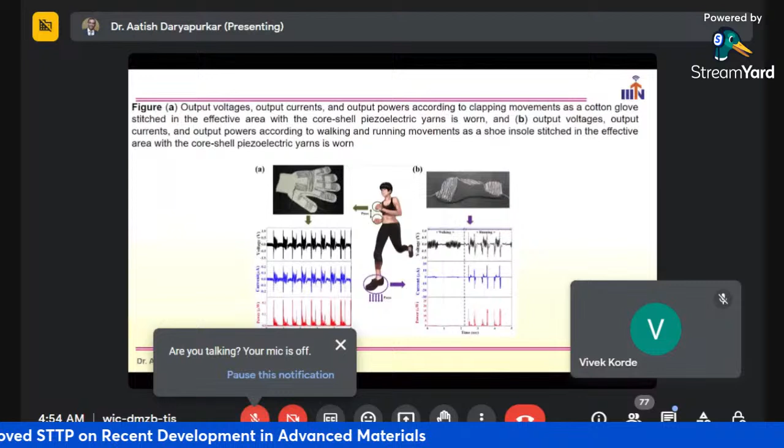For this, they had to prepare a special type of assembly to study how body movements, how the mechanical energy converts into electrical energy, and how much pressure or bending is needed to generate that voltage. That is the complete study done by that group, and in this way we can synthesize nanofibers of lead-free piezoelectric materials for energy harvesting applications.

So I conclude my talk here. Let me summarize the talk.

Today we have discussed why lead-free materials are very important for electronic devices, to avoid the problem of e-waste or to reduce the problem of e-waste.

Then we discussed how we can synthesize nanofibers using electrospinning techniques, where I explained the process phenomena of electrospinning. Then the parameters of the electrospinning technique and the effect of those parameters on the quality of the nanofibers, how we have to optimize those parameters to get good quality nanofibers, and then the application of the nanofiber.

In the application of the nanofiber, you might have learned that nanofibers can be utilized in military applications, electronic devices, and the medical field. And the energy harvesting application is one of the excellent applications of this piezoelectric ceramic nanofiber.